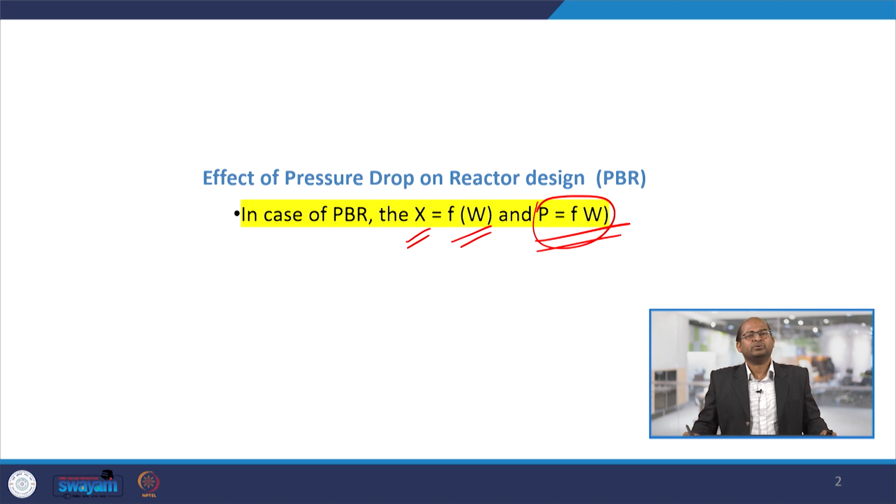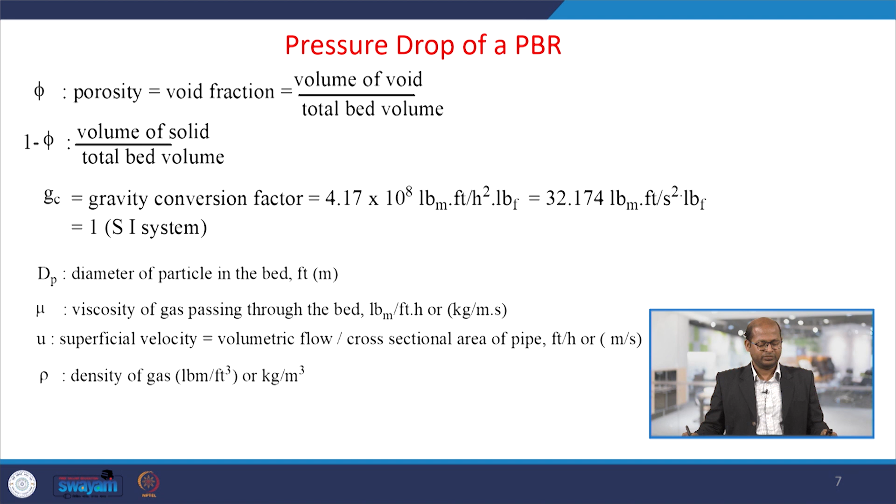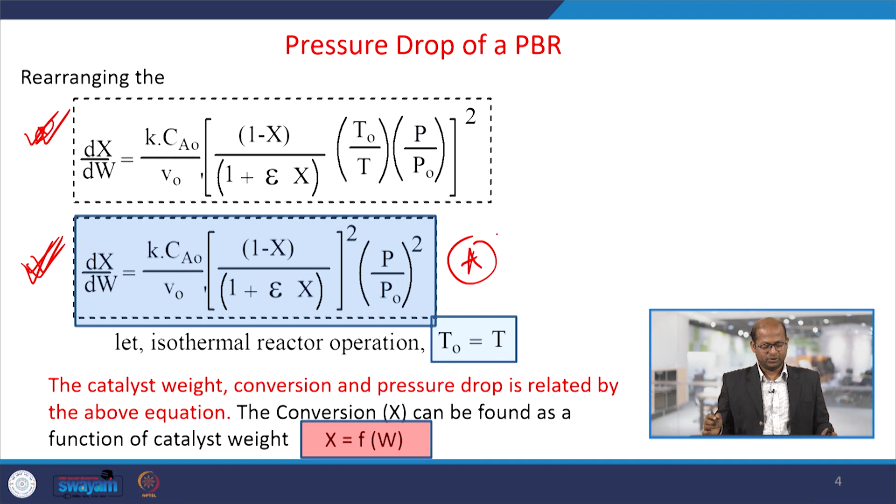So, this is the Ergun equation I mentioned. These are the two equations, equation A and equation 1, that would be useful for the study of pressure drop in a packed bed reactor. Here we will consider gas and solid reactions, meaning gas is the reactant and the catalyst is the solid particles.

Let us say if we increase the temperature of the gas, then the density or other parameters will change. So, in the case of a gaseous system, the density of that component or gaseous mixture will be affected by temperature as well as pressure. So, how are they related? Let us say we have a system and we want to calculate the pressure drop in the catalytic bed.

First, we have to consider the system as a reactor operated at steady state, and let us say m dot, in kg per second, is the mass flow rate of the reactant in the reactor at any point, and m dot 0 is the entering mass flow rate. So, here mass is entering, and if we collect the mass at any location inside, that would be m dot. That changes inside the bed if there is a change of temperature or pressure inside the bed.

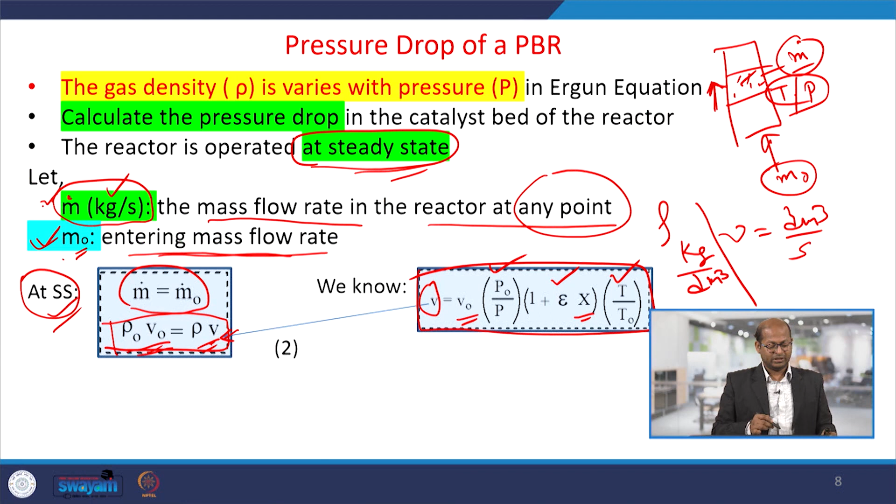In the Ergun equation you can see there is a density component. So, we substitute the density in this equation, and the final equation we get is this. Once we substitute this density in equation 1, here we express it in terms of minus beta 0 P 0 by P, F T by F T naught, T by T naught.

This is again rearranging this equation into this. Except minus P naught by P, F T by F T naught, T by T naught, the rest of the terms we consider as beta 0, usually called the pressure parameter, so the equation becomes much more simple. So, beta naught P 0 by P, F T by F T naught, T by T naught. So, dP by dz equals this, and we get equation 4.

So, now we said there is a relationship between the catalyst bed height and catalyst weight, so we will discuss that here. Z is the reactor bed length and W is the weight of the catalyst. Let us say W kg of catalyst, and the bed length is Z. So, how are they related?

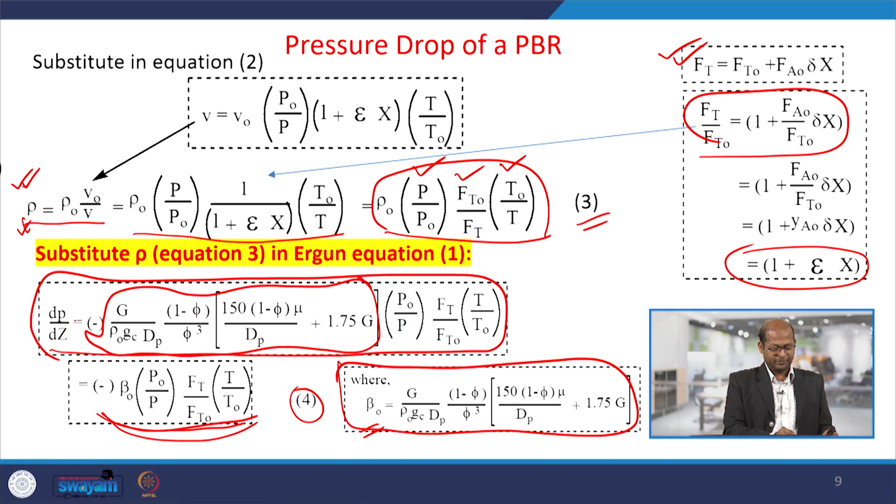So, now equation 5 is coming in terms of dW by dz. Now, in equation 4 we have dP by dz; whatever dz we have, we are rewriting in terms of dW. So, in equation 6 we are getting dP by dW, meaning either we can write in terms of dP by dz or dW. So, here we are changing to dP by dW. That equals this simple equation. Okay. So, equation 6 is a much more simplified equation. Again we will do further simplification.

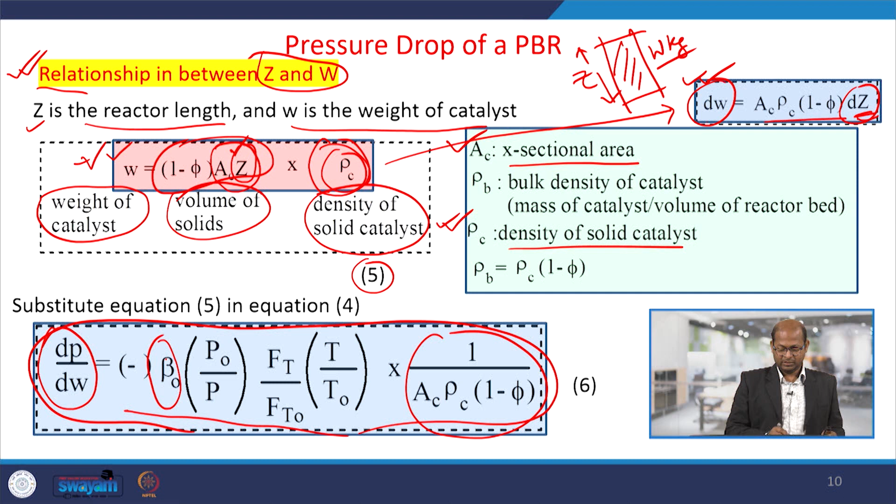So, dP by dW equals, here this term was there. So, how we can change these terms, see the equations. Here we take one more parameter, alpha. Alpha equals 2 beta 0, multiplied with 2 top and bottom, and then this part. So, here you have divided by 2. We consider this part as alpha, and alpha is directly proportional to beta 0, the pressure parameter, with some factor.

So, here we get dP by dW, and in these equations P by P naught is the y we are considering. Whatever equations we have, step by step we are simplifying them for our analysis. Then d(P by P naught), where P naught is the bed initial pressure. Let us say we started with 10 bar pressure, and P is the pressure at any location. So, y is the ratio of the pressure P by P naught. So, we assume this.

So, now on the left hand side in differential form, dP equals dy into P0. So, this way we can replace in terms of dy here. So, we get equation 8, dy by dW equals minus alpha by 2y, where y is the pressure ratio. Here also P by P naught is there, therefore y is also coming. So, equation 8 is useful for multiple reactions if there is any pressure drop in membrane reactors.

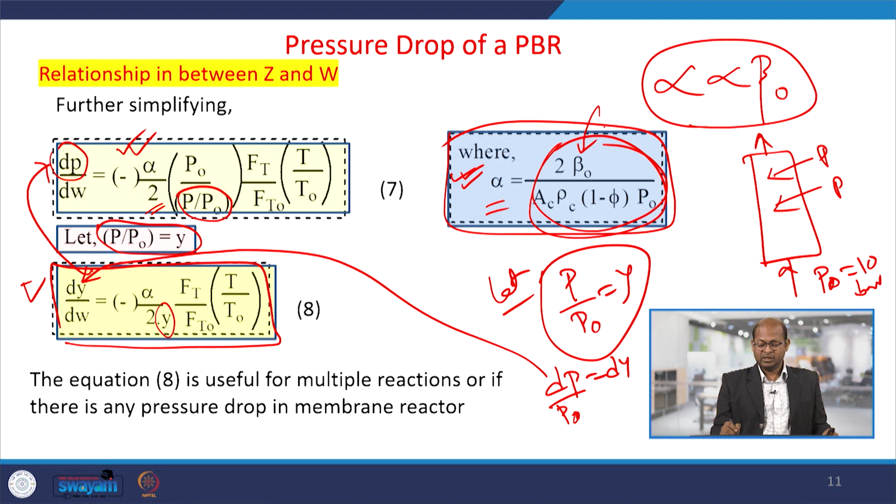And how we will get the alpha value: alpha is 2 beta 0 by AC rho C into 1 minus phi into P naught. So, first we have to calculate the beta value. Once we know beta 0, we will know alpha, and once we know alpha, we can put it here.

So, then these differential equations are the Ergun equation in differential form, that is, for the pressure. These equations we can use for changes of the pressure along the length of the catalyst bed; we can find that out using these equations. We have to solve them, maybe analytically or numerically we can solve these differential equations.

So, here we are considering cases. Let us say epsilon equals 0, there is no volume change, or there is no volumetric flow rate change in the reaction. Epsilon may be negative, or epsilon may be positive, depending upon that. If epsilon equals 0, there is no change of volume during reaction, or no volumetric flow rate change. This is from the reaction stoichiometry, from the reaction point of view. So, if it is 0, then there is no extra pressure drop effect.

If epsilon is negative, then there will be a pressure drop that would be less than at epsilon equals 0, where we consider there is no volume change. Okay. If positive, then there will be a pressure drop that would be greater than at epsilon equals 0. At epsilon equals 0 we are expecting there is no volumetric flow rate change during reaction. So, as compared to that, it may be positive or it may be negative depending upon the reaction.

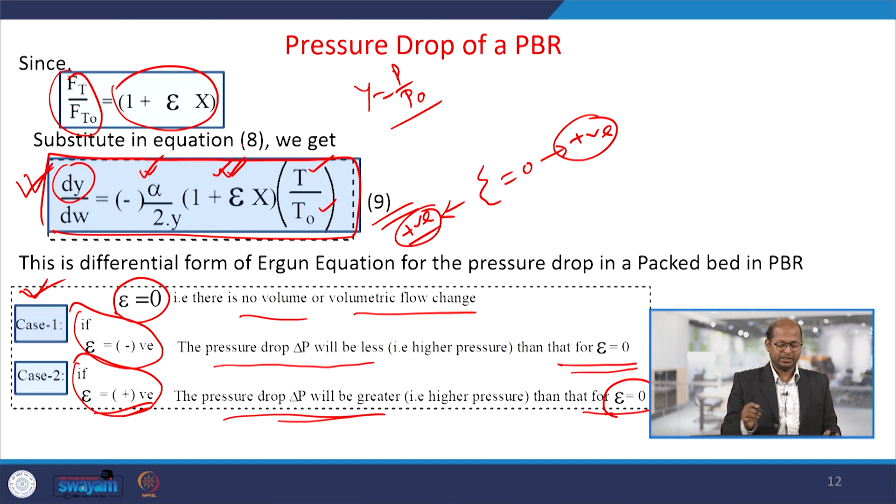So, this also would affect the overall result. This fractional volume change is also a very important parameter. For a particular reaction it is standard; it is fixed depending upon the stoichiometry of the reaction. So, if it is positive, negative or 0, how would that affect it? If it is 0, then we can directly eliminate these components, and the equation would be much more simple.

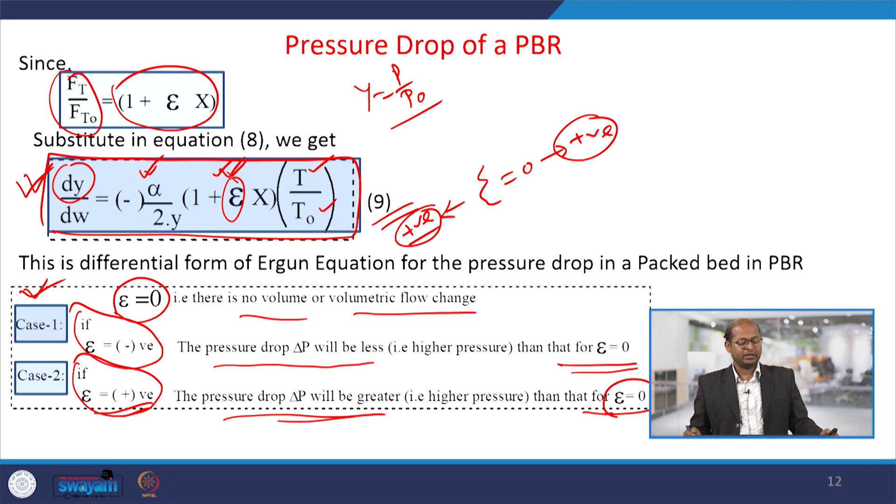Okay. So, today we have derived these differential equations from the Ergun equation, and from the material balance equation or design equation of the packed bed reactor. So, these are the two differential forms of equations. This equation we derived in our earlier class, and today we have derived this equation. These two equations we have to solve simultaneously.

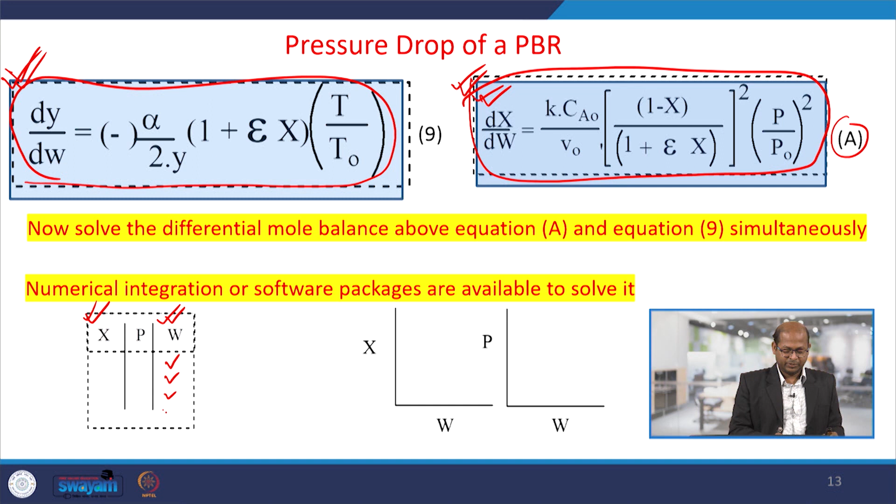Okay. So, these differential equations we have to solve simultaneously, then from these equations we will get conversion with weight as a parameter. If we change the catalyst weight, then we get the corresponding conversion. So, this value we will get from these equations, and from these equations we get pressure versus W. So, what would be the pressure if we change the catalyst quantity, those values we will get.

So, there are many numerical integration methods or software packages available that we can use to solve these differential equations, and then simple numerical values would come, in the form of tables. If we put in all the right hand side parameters during the integration, all these components are known; only the catalyst weight we vary. Then conversion changes accordingly, and the conversion versus catalyst weight curves we get from these equations. Here I am not saying what the nature of the curve would be. That we will discuss later.

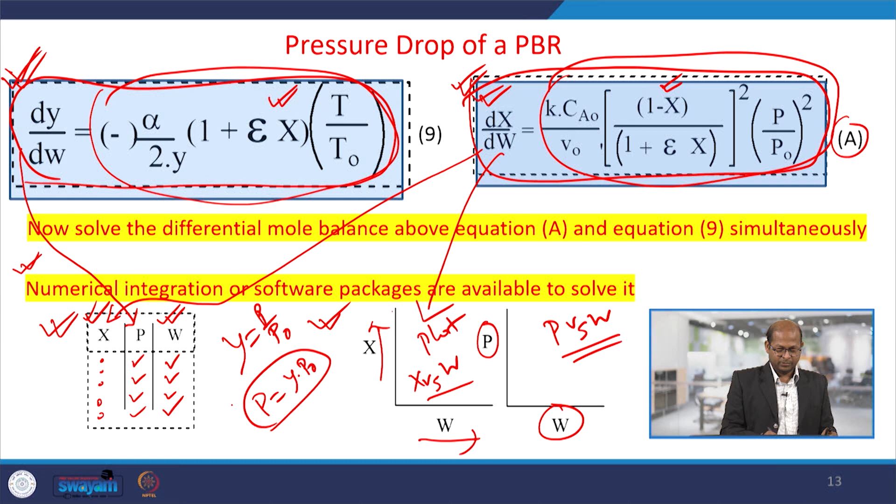So, these plots, x versus W, we will get, and p versus W we will get, meaning how pressure changes with the catalyst weight. So, what the nature of that would be, we will discuss. Okay. So, we have developed differential equations where y is p by p naught. So, if we get y and multiply with p naught, we get the pressure at any location. So, the pressure at different locations in the bed we can get. So, these are the two equations we have to solve simultaneously by different techniques.

So, these are things we have studied today.

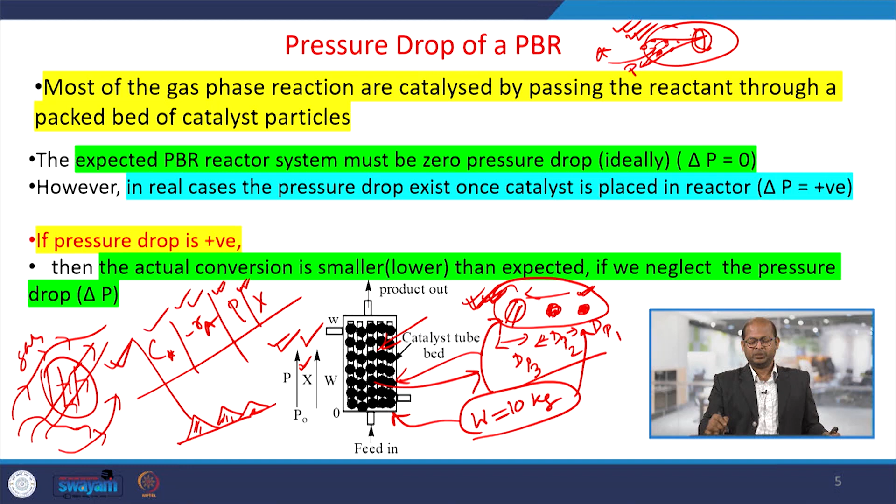in the form of spheres. With that we can optimize the pressure drop inside the reactor, and at the same time get more conversion, more reactants converted into product, and eliminate the internal diffusional effect. That also we have to keep in mind. That part we will discuss in our next lectures.